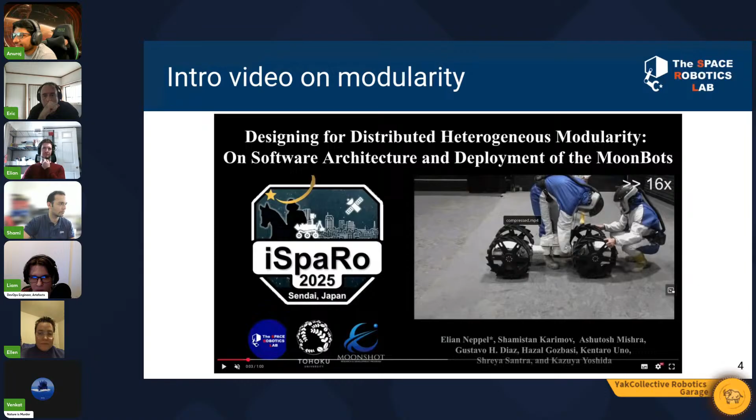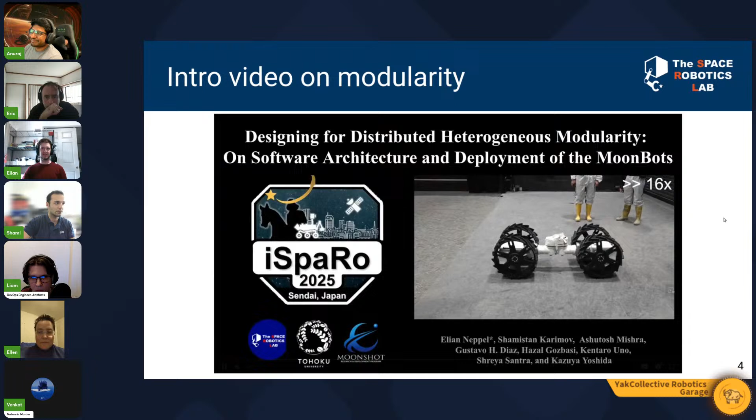So first video to introduce the modularity aspect of everything. This is the video for my upcoming paper at iSpaRo. So you can see we can assemble those robots together. Here is a 3 degree of freedom limb that we connect to 2 other wheels. And you can also notice that the robot is actually quite big. So it's quite dangerous to work with also. And then we can simply drive it around on this simulation test field that was at DLR, Germany. We went there. And just drive and explore just with this vehicle configuration.

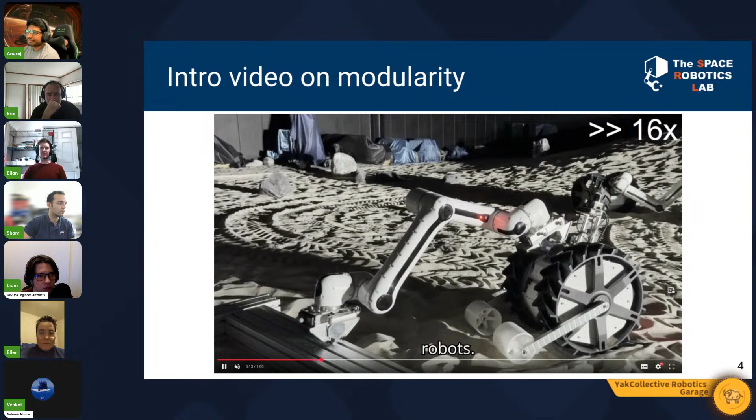And for assembling, this is actually the job of Shami, who is here today, automating the assembly. Here, his algorithm will go towards the wheel with one of the limbs, and then it will grasp automatically the grasping point on the wheel. And then the wheel can roll away.

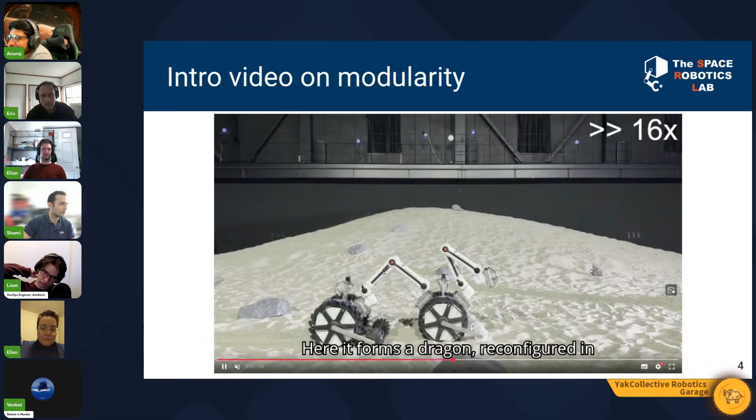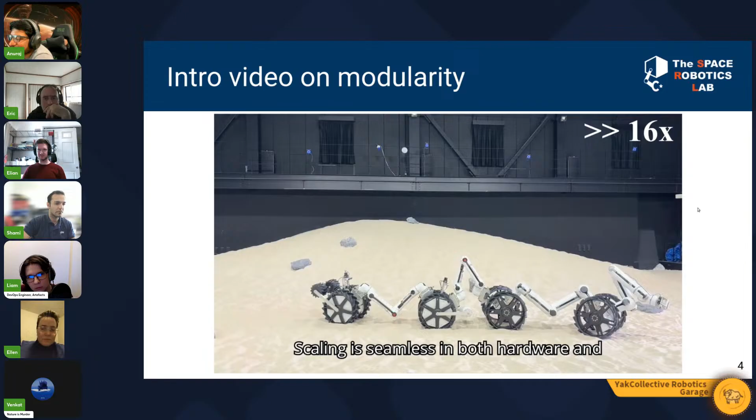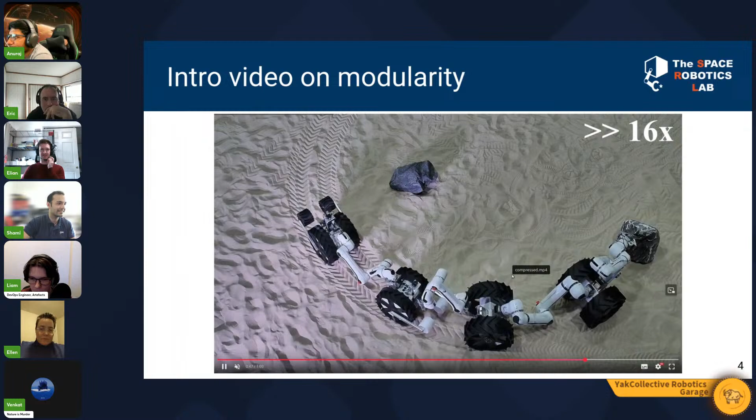Okay. From this minimal configuration with only one limb and one wheel, we can then connect them together to create a dragon. And here we can close the gripper and it can roll again. And from 2 dragons now, we can once again connect both of them to create something that we don't have a precise name for. But sometimes we call it the Shinkansen MoonBot, because there are many, many different parts and it looks like a train. And we can steer that, go somewhere, detach, and once again, continue onto a mission. So that's the introduction of the modularity side of the robot, that for us is the main goal of this robot.

Of course, the main goal is also going on the moon, etc. But as the developers of this robot, that's what we are currently focusing on.

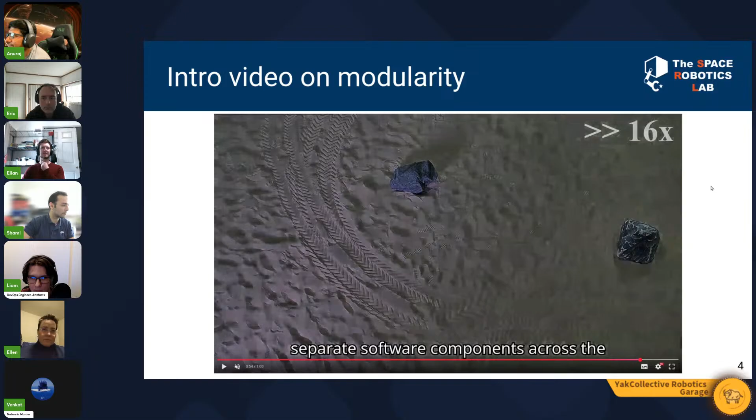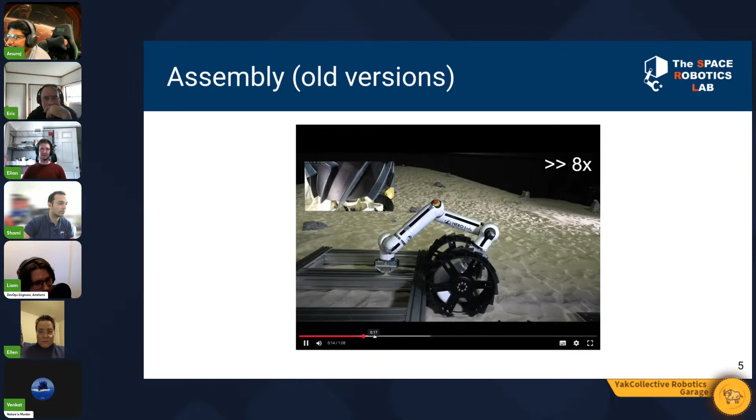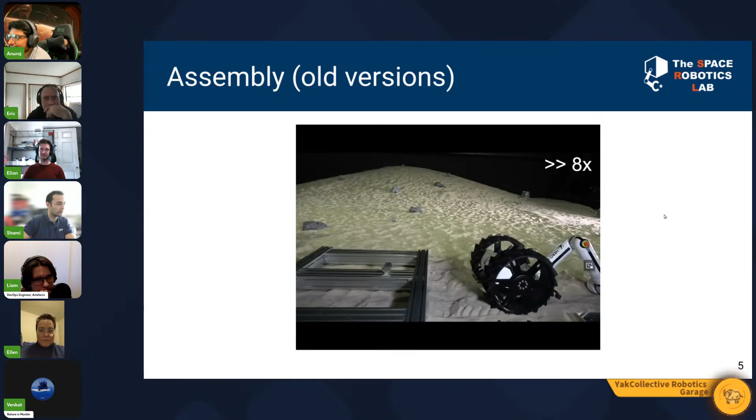And for assembly, this is a much older video. As you've seen before, Shami has improved this a lot, but here we can again connect to the wheel. Oops. Okay. We can connect to the wheel. This is an older version of the robot. Connect to the wheel and then drive away. This is a very old video, so it doesn't look that smooth. It has been improved a lot through time.

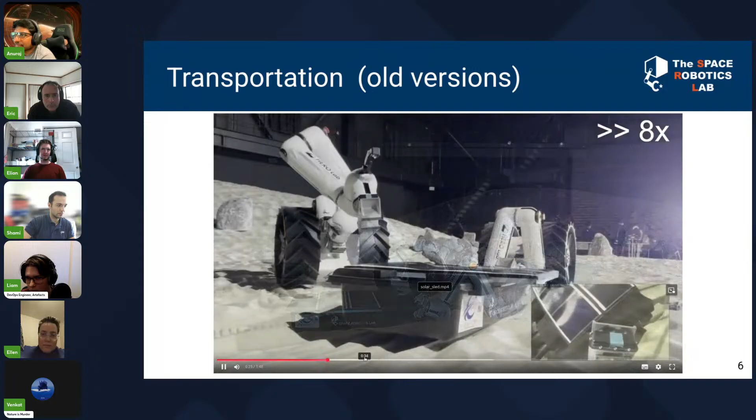Here for transportation, we actually can drag stuff on the ground using the minimal configuration. And here, for example, we bring a solar panel inside of a sledge, and then the dragon that is able to locomote and also manipulate will place the solar panel upright. And once we do that, we can kind of build a moon base. That's also a goal, to build a moon base, even though right now I'm more focused on modularity and the robots.

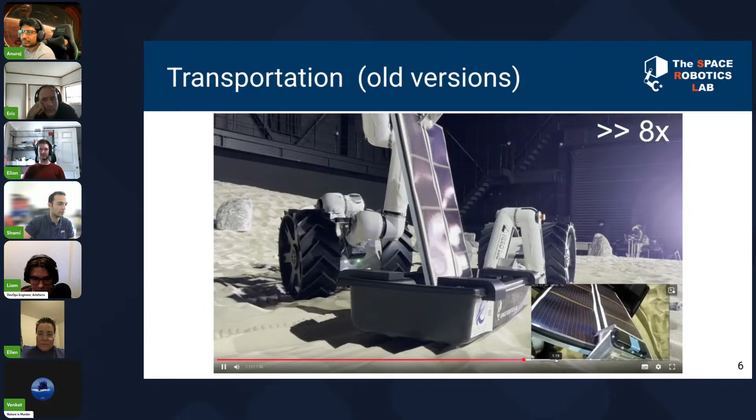So, sorry, is this automated or is it remote control in this video? Yeah, in this video it is teleoperated. Okay. So no automation yet. Thank you. Sorry, I keep switching slides because playing videos in Google is not okay. But yeah, it's teleoperated for now.

And even teleoperation of those robots is actually very difficult, as we'll explain on the network side, the software side later, especially for us that are just students. And there are many, many motors to control using inverse kinematics, synchronizing the wheels, etc. That's already very hard.

We have some more manipulation video. This is just to show off maybe the inverse kinematics that are working. So here we have actually some kind of inflatable module, and we want to place something and interact with the inflatable module to maybe do some repair or do some inspection. Or here we place a block to stop it and maintain it so it doesn't roll away. Yes, and this was the very first version. So again, we've done lots of improvement since then.

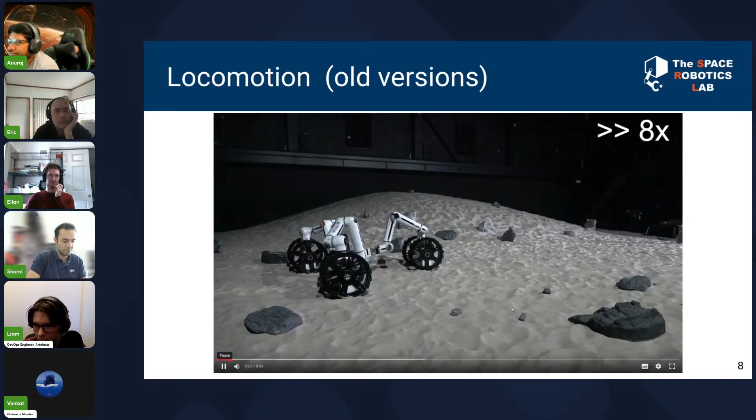We'll see later. And locomotion, this is the tricycle that we can see move with those 3 wheels and navigate. We are not focusing that much on the tricycle right now because we found it not very useful in the end. Yes, so those are the cool looking robots we have.

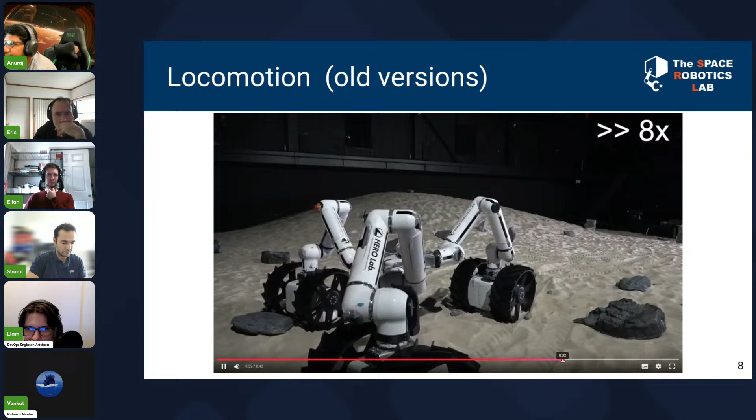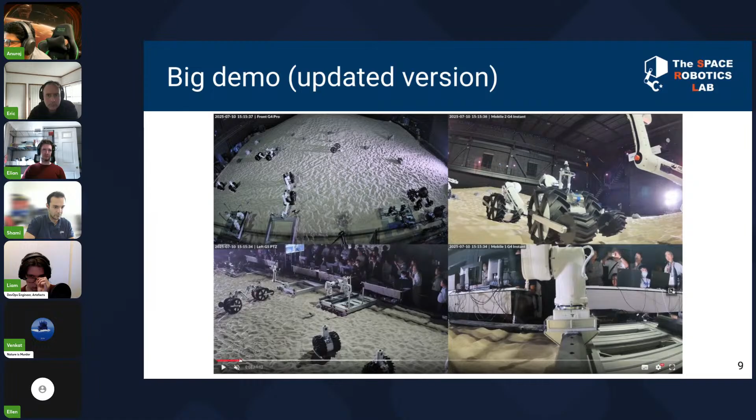And now for the new version, first we did quite a big demo in this sand field. This sand field is in JAXA, by the way. So in there, now it's automated. So you can see, wait, if I can take the laser pointer. Okay, it doesn't mark over the video, but basically you have the vehicle that is here under my cursor on the top left. This vehicle will start moving automatically towards one of the limbs that is around here. And you can see actually the limb on the top right camera there. So it starts automatically going towards the limb.

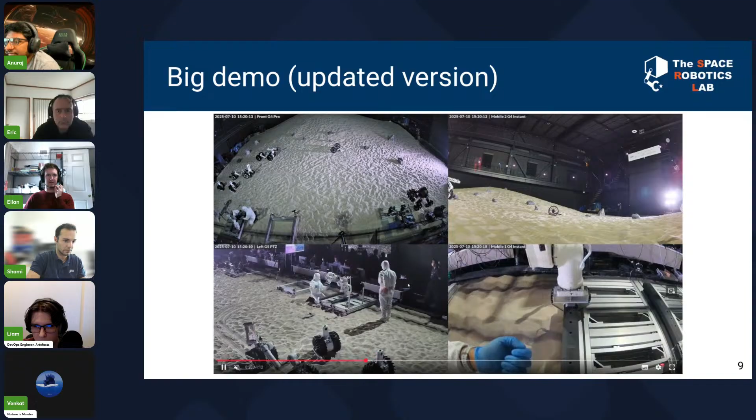Then Shami's algorithm will automatically connect to the vehicle. And once it's connected, it forms a dragon. And then this dragon has a manipulator and can continue to locomote somewhere else. And here you can see that compared to the videos before, it goes much faster and much more smoothly. Then we had the second dragon in the back that was running on the same network. Networking is a huge issue we face.

And this one will actually go towards the inflatable module, which is this white cylinder in the back there. And actually it is also automatically guided towards it, this time using a camera system to find where the inflatable module is and automatically steer towards it. And it will slowly go towards it. It went towards it a bit too well and collided with the other robots that were on the field. So there was this, but it actually went there.

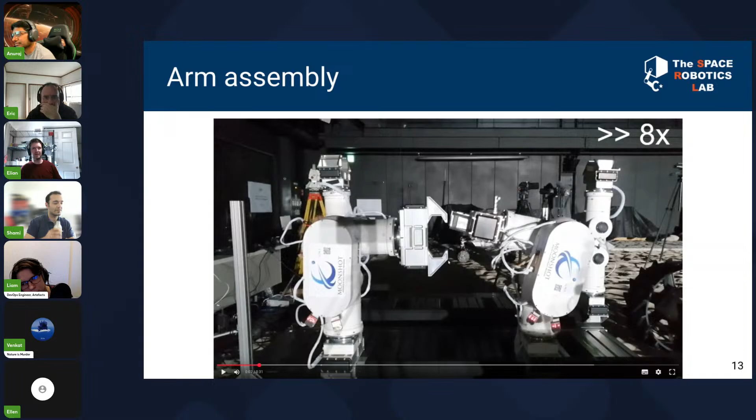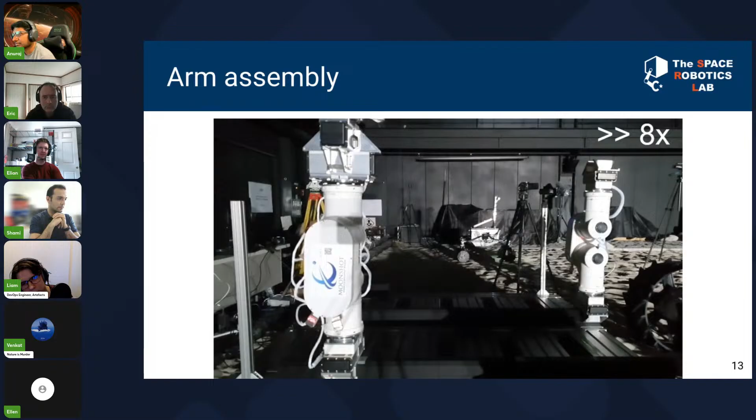Again, the assembly by Shami, I think he will show better videos than this a little bit later. And we've also already seen many of them. This is actually the 4DOF limb module that's made by neither me nor Shami, but someone else in our lab. And it's also very cool because they can assemble themselves: they go from 4DOF, then they connect, and now it becomes actually 7 degrees of freedom. And it forms a bigger limb.

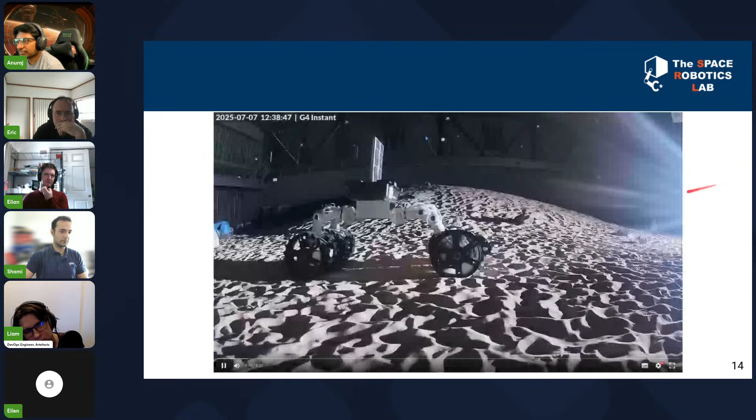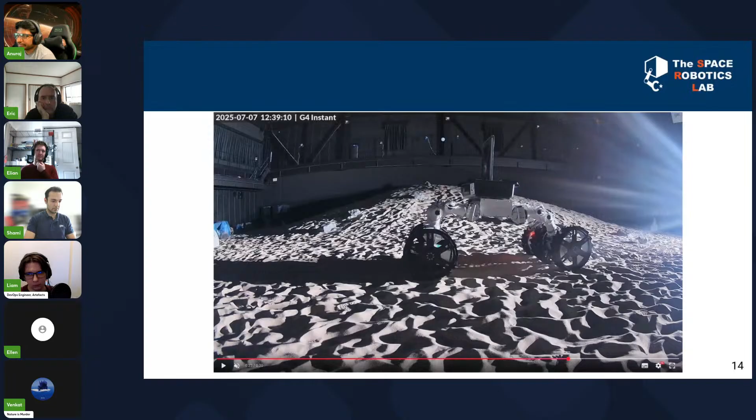And okay, those can also be used for this kind of cargo transportation. If you remember before, we had the tricycle with 3 wheels. This one is actually a bit more lightweight because there are fewer motors, and we can once again steer around, etc. That's Shami's slide. So if you want to take it from there.

Thank you, Elian. Could you please start the video? We can just continue sharing this one. So right here is one of the configurations that Elian was explaining, for example, the tricycle. But this time it also has a manipulator on the top of the body. This experiment has been conducted in the lab.

And as you can see, the legs, which are basically the same manipulators as the arm on the top, are acting in this experiment as a height extension and going down closer to the ground. And thus it allows the manipulator on the top of the body to grasp the solar panel and transport it. And then, of course, they can raise up, and everything is being synchronized by the software that Elian has developed. And I believe he will talk about this a bit later as well,

in more detail. But utilizing this software, as for example Liam asked about the shared data bus, there is nothing like that. So basically, the software is the master in this case. It is conducting everything, so nothing gets stalled or left behind and stuff like that. Yeah. Can go to the next slide.

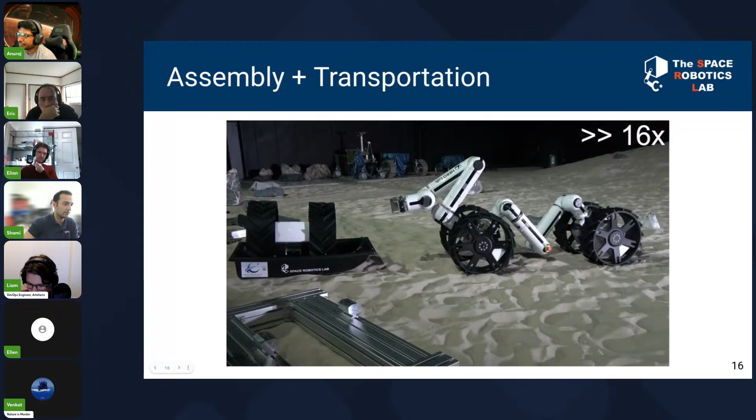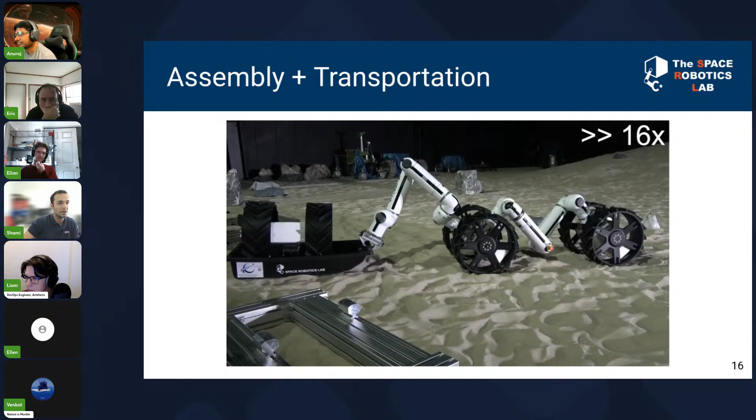And of course here, the same dragon is reused to, again, autonomously grasp the sled and transport it. The idea is also, in this case, software-wise, to reuse the same controller for different manipulator configurations. So that's my work, basically what I've been doing here, developing a controller that can be reused across different platforms without any big tunings or changes.

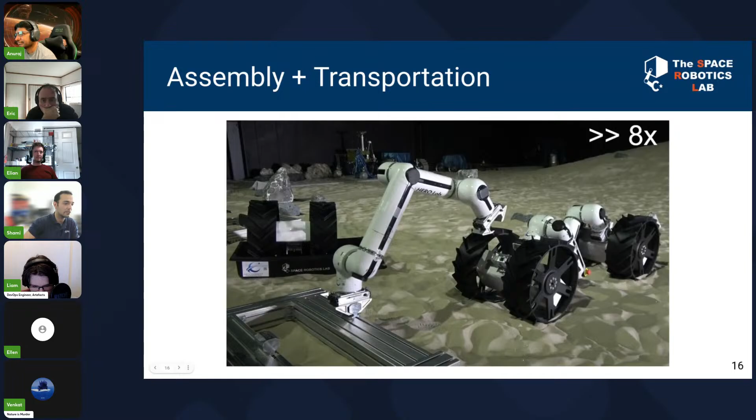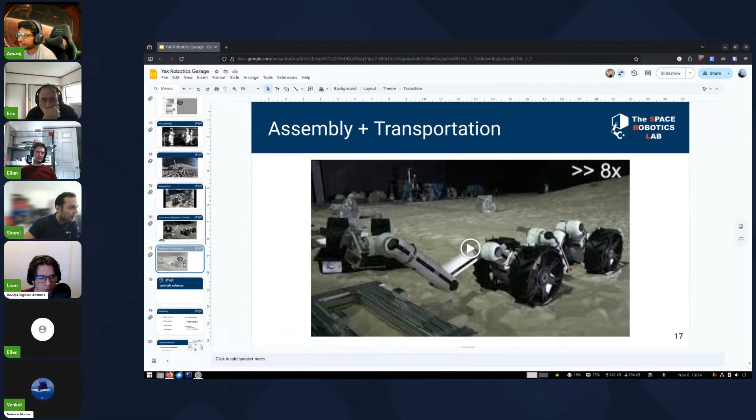Actually, Elian, can you exit the slideshow and start again? I think I added one more. Yeah, after this one. The one before. Yeah, the one before. The one after 16, slide 16. Yeah. Yep.

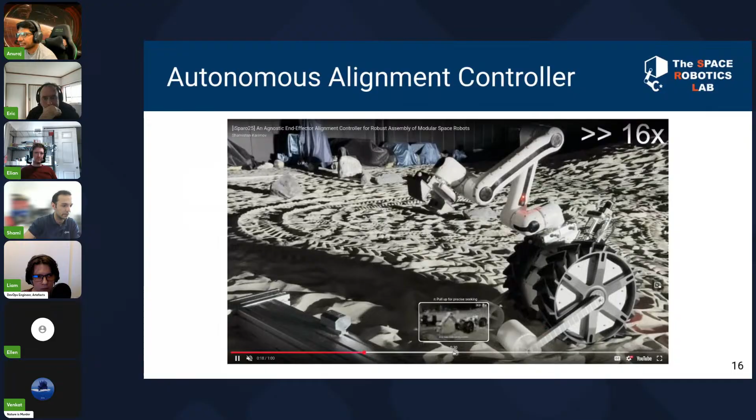So this is the video that I have submitted for the conference. It's gonna be in December, actually in our city. And this is about the controller I've been talking about. You can skip this part. We already showed the dragon part. Yeah, but the idea is, as you can see, the controller is reusable over different configurations and even different manipulators.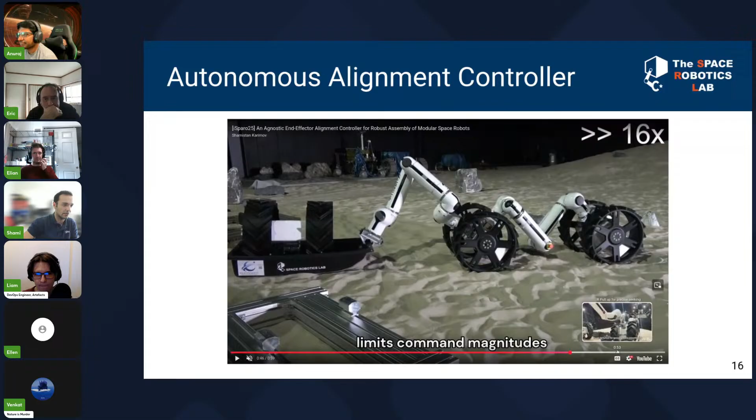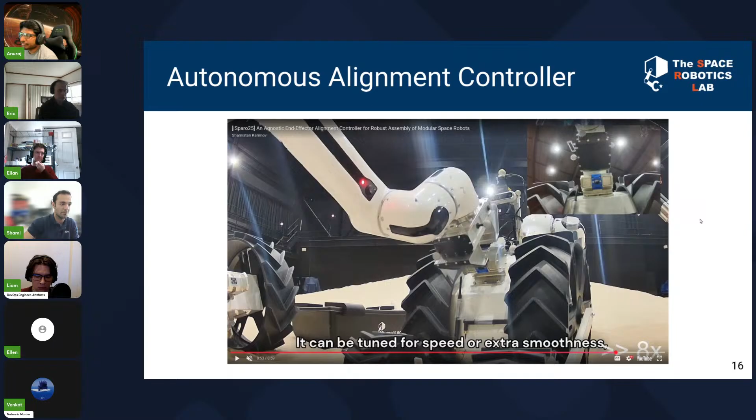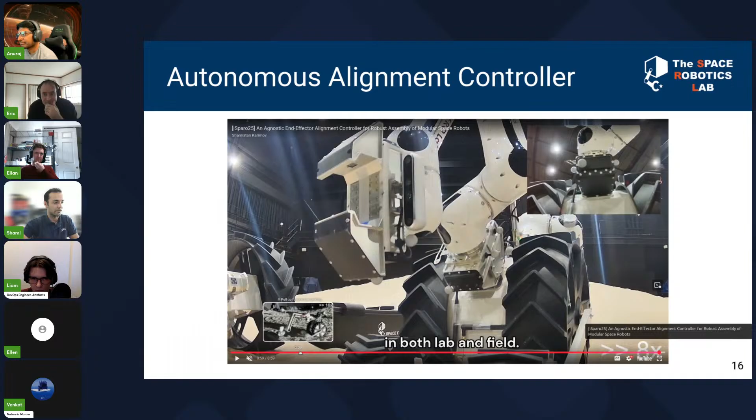For example, right here we have the V1 configuration, the old version of the arm, doing the assembly or grasping on a manipulation task. And after that, we have the same controller running on a different kinematic chain of a manipulator and performing the same way, and doing a self-assembly, for example, in this case. So tasks are different, and robots are also different. The configurations are different, but the controller is able to adapt and also assemble robustly and stably.

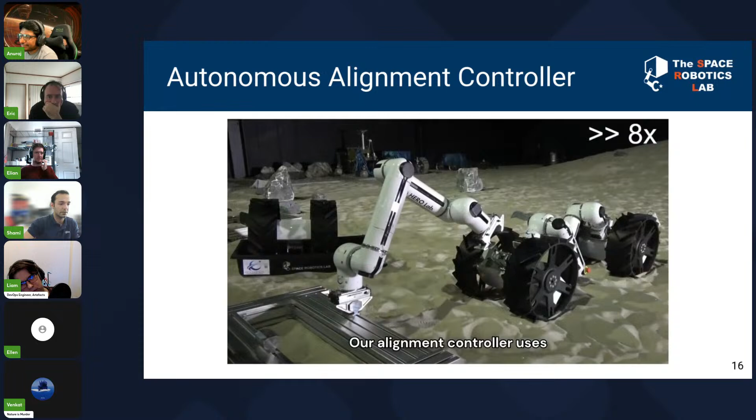I think I can go next. Yeah. Okay. That's it for you? I think for now, yes. Maybe later as well. Okay. Yeah. Interrupt me later if I miss something. There's also a lot of questions that people are asking, so I could go over that later as well. Yeah, okay, but let's go over that right now. Before talking software, let's have a small break and talk about just the robot itself before everyone forgets about the robot itself.

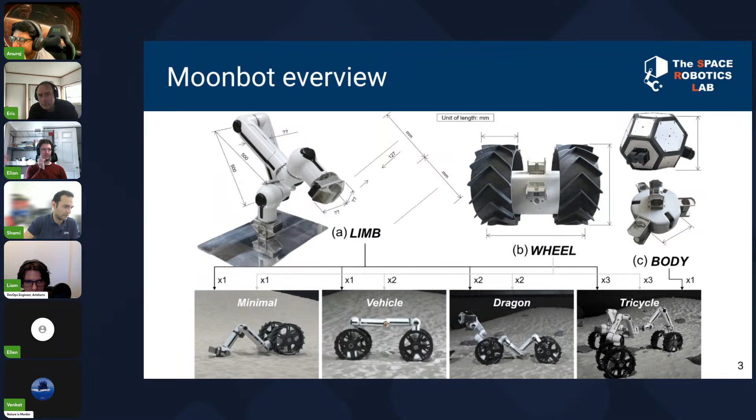Regarding some questions that I saw in the chat about the hardware, as I said, it is custom-made hardware, and right now in this presentation we have presented only the version 1, which is this one, and version 2 slightly, but there's also a newer version that we have presented at the Osaka World Expo. And actually, that one you can see on the tricycle manipulation that I have added. So that one is the newest version, and every newer version is of course improving, with a different power source as well.

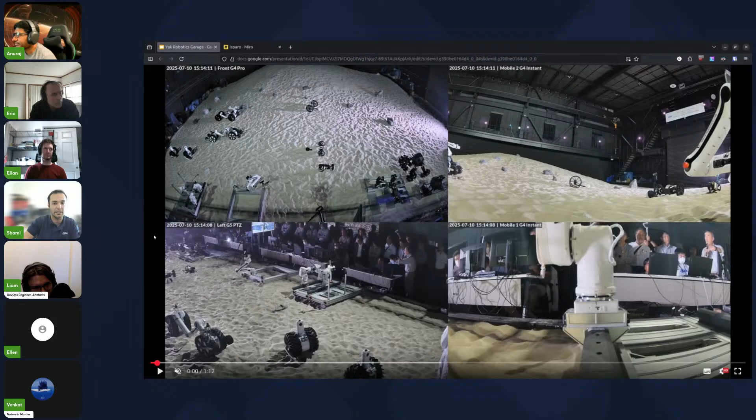It's of course under the hood. It's using a battery, like for the arm or for the wheel, but overall the power structure has been improved. It is using a battery management system to basically manage the flow of the power and stuff like that. And newer versions of the hardware also have chain charging, let's say. So for example, as we mentioned, these arms connect to the wheels a lot, and they also connect in, for example, series or parallel, etc.

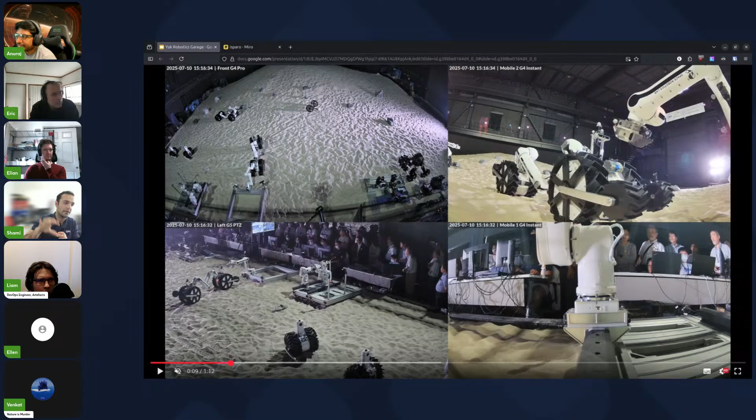And every gripper has a connector that attaches basically to the grasping point of the wheel, also basically transmitting the power. So if we have external power, for example, connected to the end of Dragon, to one of the wheels in the back, the power will get transmitted up to the manipulator. So this way we can easily charge the robots as well, much faster, using less power supplies and less cables and stuff like that. But also they can transmit power in between, even if there's no power supply. So they basically kind of use a unified and centralized power supply when they are attached to each other.

Then also, how is the recharging of the power source? Just using basically normal power supplies. We attach... Yeah, the BMS inside handles the balancing of the batteries and charging of the batteries, and so we just have to plug a 24-volt power supply, and then all of the modules that are connected together, if they are the latest version, they will then share this 24 volts between all of the BMS.

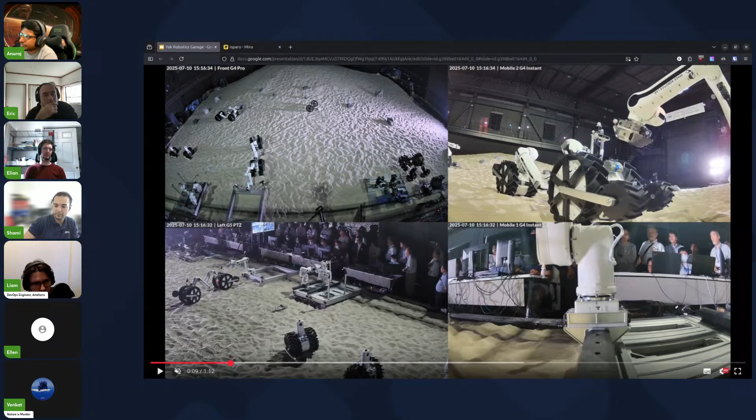Yeah. So on the moon, it will be solar panels, right? To charge the robots? That's the idea. Yep. Actually, one of our students also has been researching different ways of charging. For example, it's really not my field, but it's microwave power transmission. So using microwaves to charge the robots, which is also another interesting way. But still, of course, research in progress, and hopefully we can find some feasible ways to implement those as well.

Yeah. Is there any other question? There was a question about how the arms communicate. Usually now we are only using Wi-Fi, right? Yeah, we will see that later in the software. It's only Wi-Fi, and right now in those videos they do not communicate between each other, but we are currently working on a mesh network to do that.

Yeah, there's a question about materials from Ellen. So materials that are used are mostly kind of like a mix of PLA and carbon fiber. That's the outer casing, of course. The actuators are mainly aluminum alloys and stuff like that. The gripper as well. The gripper is also not fully aluminum. Some of it is just plastic PLA. So it's not really heavy, but because it's really big,

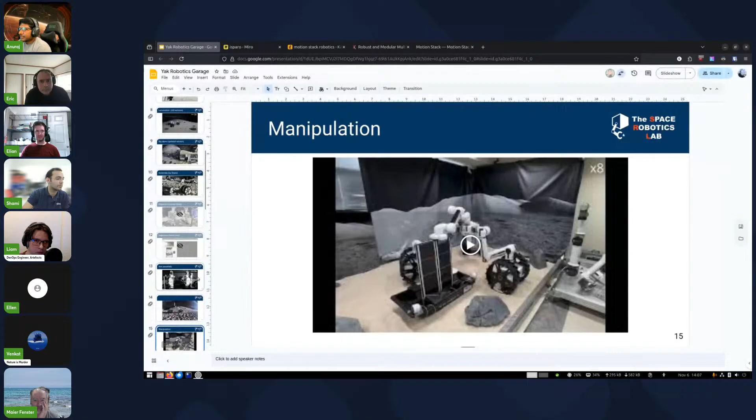I think we can move on to the software now, right? Yeah, okay. I think we talked about everything on this side. If there are more questions in the chat, we can answer later, of course. So let's continue on the software, which is more of my job, so I can answer the questions much better and much more in depth.

So first, we want to work with modular hardware. When I started working on the software, I noticed that if I want modular hardware, I also need modular software because I cannot reuse the same software everywhere. It has to be modular also. Modular software and hardware means that the software then has to be module or robot agnostic. It should be usable on any robot.

So when you think of robot agnostic software and ROS2, which is very popular right now, you of course think of MoveIt2, where you can just give it a URDF and it will compute the inverse kinematics or the trajectories you want. But there is a quite big problem with MoveIt2 that makes it not usable for us: it's only usable for one limb at a time, and we do not have that. And it's also only for manipulation tasks.

As you've seen, we have the wheels rotating, steering left and right, all of this. And also we have to change the configuration and change the URDF quite a lot. And with MoveIt, when you change the robot, you have to reconfigure everything in the settings. You have to say, okay, there is this joint here with this torque, this joint here with this torque. Every time we change the robot, that takes way too much time.

And here's some more videos, because I don't want to speak too much about theory. Here, for example, I don't know how many robots, but this is version 1, 2, 3, and the 4DOF arm, and I control all of them at the same time. This is not just mirrored joints, it's really different robots loaded inside of the software that are all being controlled at the same time. This is Gazebo, right? No, it's not Gazebo, it's just RViz directly. Okay. So no simulation.

If I can play the video. Okay, switch to the next slide. Can I get... Okay. I just wanted to show something else, but apparently Google doesn't want to let me.

Oh, yeah. I think around the end, here I just use the user interface that Shami did, and I'm going to select more of those robots down here to make them move. And they also started moving with all of the other robots. So you can see it works in runtime to consider more or less robots that are all different, with different DOF, etc. It's actually pretty cool.

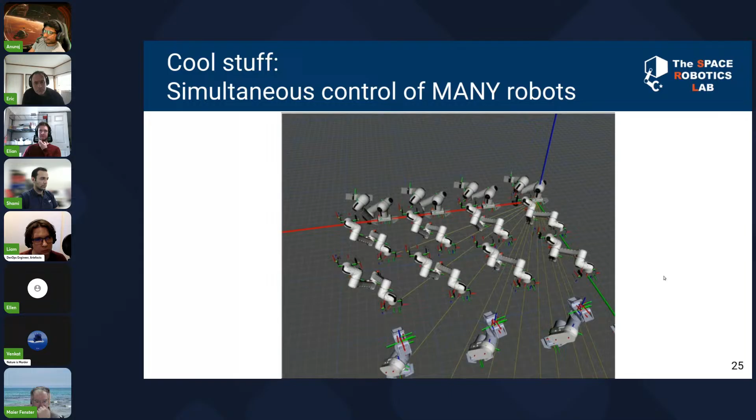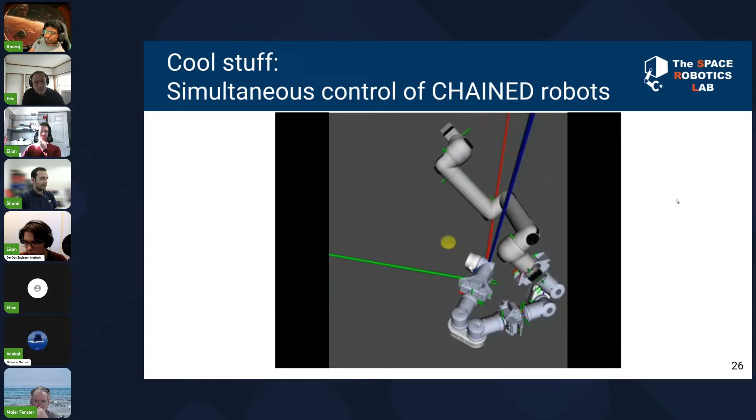And those were all robots in parallel. We can also put them in series. So here I'm doing end effector control, moving back, up, down. I don't know how many DOF there are on this, but it's 4 robots, one after the other. And they are moving using inverse kinematics, forward, up, down, doing all of the computations of the joint angles to do that. So that's also pretty cool. We never did this in reality because we don't have a robot capable of doing that, but it is just fun.

And finally, this is more on the API side. You might be asking, okay, how do you make the trajectory for all of those different robots? Isn't it very hard to know, okay, this motor is slow, this motor is fast? How do I keep them all in sync so the trajectory doesn't become a gigantic mess in the end with that many different robots? Especially when we want to launch a new type of robot.

I actually don't want to fiddle with 10,000 settings to say, okay, this motor speed is that, this motor speed is that, etc. If I could, I would like to not do any setting. And actually, that's possible with this software because all of the trajectory and adaptability actually happens at runtime.

So here you can see I'm currently synchronizing the trajectory of actually 6 different end effectors. So there is the big MoonBot here. There is a small RealMan robot, it's called, here in red. And then there are 4 end effectors for this small quadruped in green.

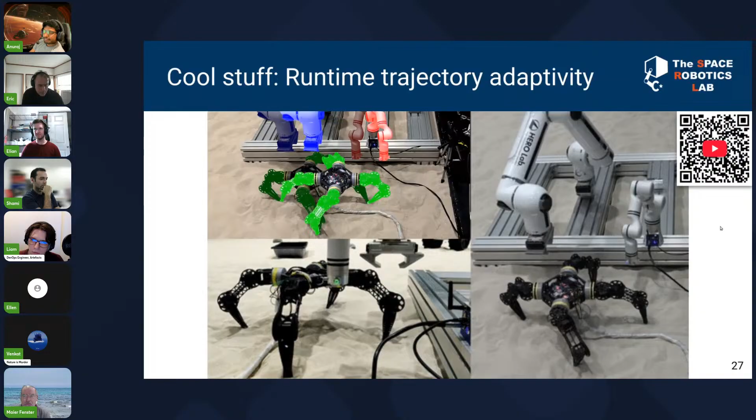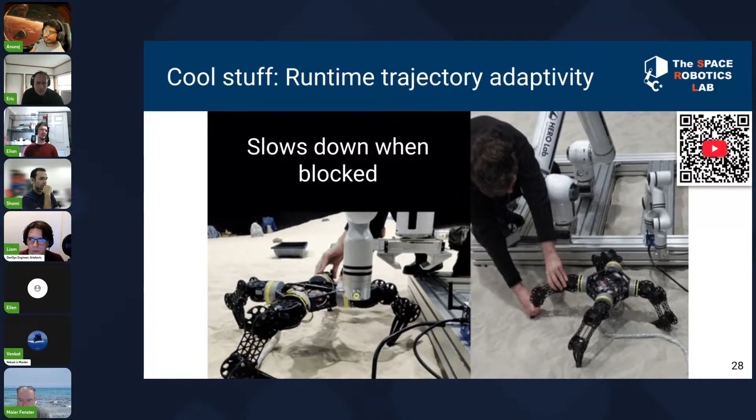And here, if I use my hand and just slow down one of the limbs, you can see that the trajectories of all of the other limbs also slow down and wait for this limb to continue moving. So they all wait for each other before continuing the trajectory.

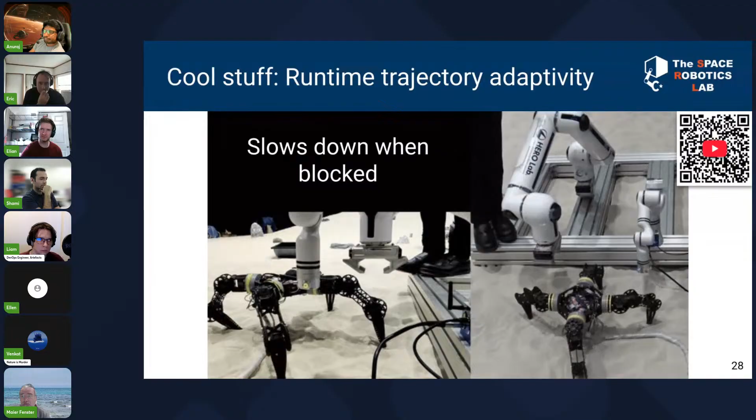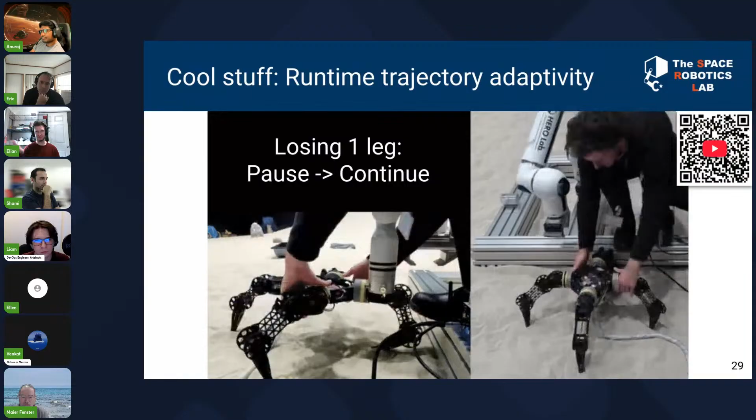And to handle also network problems, you can disconnect the limb, and if the limb disconnects, or if any motor disconnects, it actually stops the trajectory. When the limb comes back, it continues the trajectory. So this was initially developed because of network issues, but it also works if you just unplug the leg directly on this robot, which is also pretty cool.

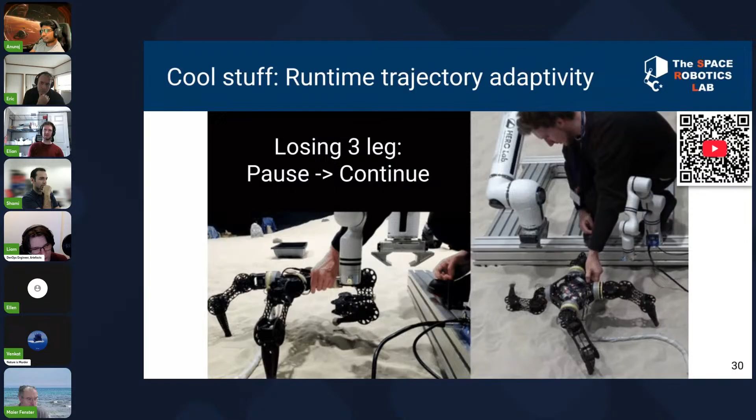And you can, of course, disconnect more than one leg. You can do pretty much anything. And as long as the trajectory is able to continue, it will just continue. And if I also unplug the power of this small robot, you can see the robot falls. And then the motion stack software will make it stand up again to go back onto the trajectory. And then the trajectory will actually continue.

So that's also very cool and very safe because we want safety first, also because if you want to go on the moon, we cannot break the robot. We cannot repair it, so it should not fail. And also I want safety because we work with students that do not have a lot of experience working with robots. So it can be very dangerous. And as you know, those robots are like 20 kilograms. So it's very dangerous to work with. So I don't want anything weird happening on the safety side.

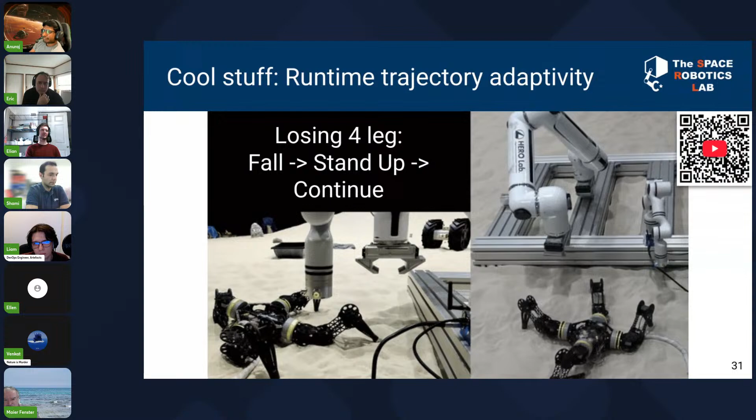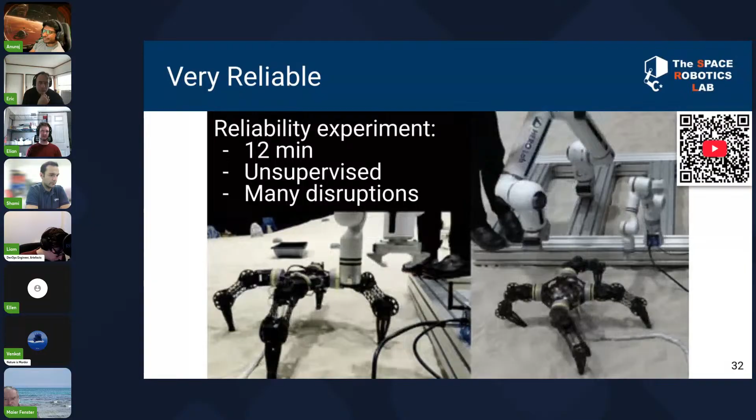And yeah, actually all of those videos were taken from one single experiment that lasted 12 minutes, where the controller just continued doing the trajectory without me doing anything on the software side. All I did was unplug stuff and try to break it, but it continues.

And that's the end for me. If you want the motion stack software, it's here. And yeah, we are looking in the future into using Zenoh instead of ROS for improved reliability and making, I think, robots open source, because this is just the core software. All of the robots with the URDF, the launching system, is not open source yet because of patents and things like that. But the core software, if you want to use it on your robot, it's here.

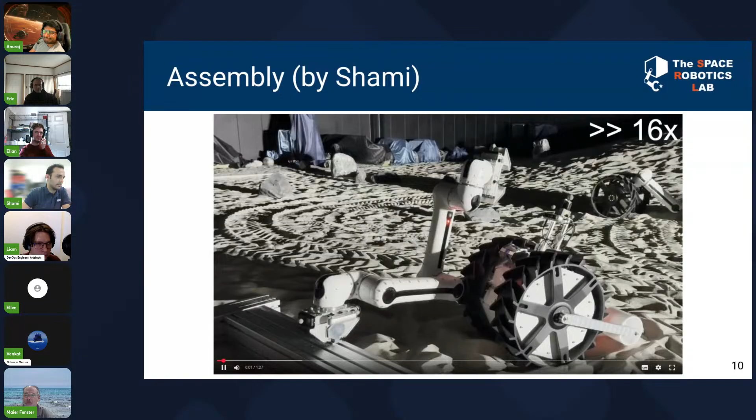So how are the wheel modules? Are they also controlled by this? Yeah, they are also controlled by this, actually. We just don't start the inverse kinematics on them, and we can just control them normally. Yeah, and also because of the synchronization that Elian was showing, it's not only end effector synchronization, but also on the wheels, on the joint level. For example, you can show the Shinkansen stuff. Okay, yeah, I have it. This one, yeah, that one is in your paper video.

But the motion stack handles the synchronization of the wheels on the joint level. So all of the wheels which are controlled, in this case it's 1, 2, 3, 4, 5, 6, 7, 8. 8 joints are controlled at the same time, and if even one of them loses some connection or breaks or it just dies, explodes, anything.

So if it's not continuing the control trajectory, then the other ones will wait. It will just stop, and that's also really good. Basically, if one wheel stops, all of the wheels stop to stop the train and not break the train. So imagine if the front wheel were to lose connection and stop moving, then the other wheels on the back should also stop to avoid breaking the robot. So that's one advantage of the synchronization that works on end effector and on inverse kinematics also.

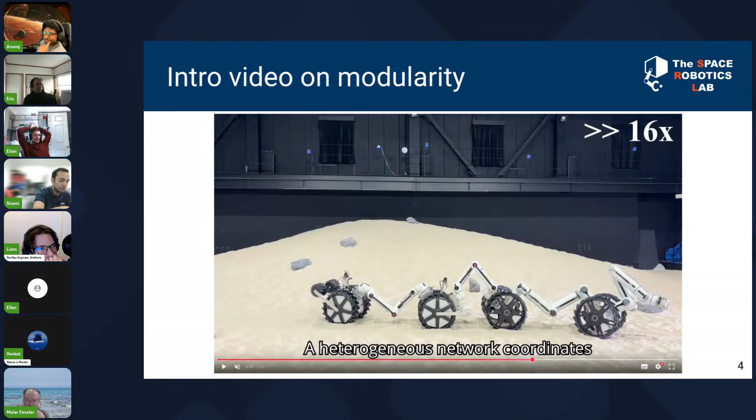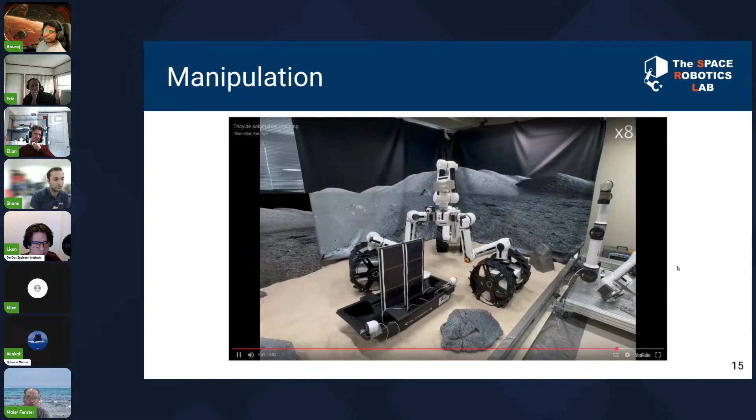And in this case especially, you can see how useful it is to control different robots and synchronize them. So you can control stuff like this. Because we don't want to have one leg pushing up while the other legs are stuck. When you are connected to the central body, they should all be at the same height.

Do the wheel modules and the arm have the same controller board, or are they heterogeneous? They have the same. You mean lower level? Yeah, the lower level hardware used. Like the hardware, yeah, it's the same. Actually, the low level we also developed. It's not anything open source. We just developed it from scratch using the normal common libraries and stuff like that, of course. And we developed those things in a way that is also modular. So we have only one low level controller, and it works for all the robots, whether it's an arm or the wheel.

It just launches the correct way, and it's heavily inspired by the launch API of the motion stack. So it's kind of working in the same way and knows what to launch. The robot itself knows what motors it has, what it should launch, and stuff like that. And we have this Maxon motor on this robot. But we actually use O-Drive on another robot. The 4 degrees of freedom one uses O-Drive.

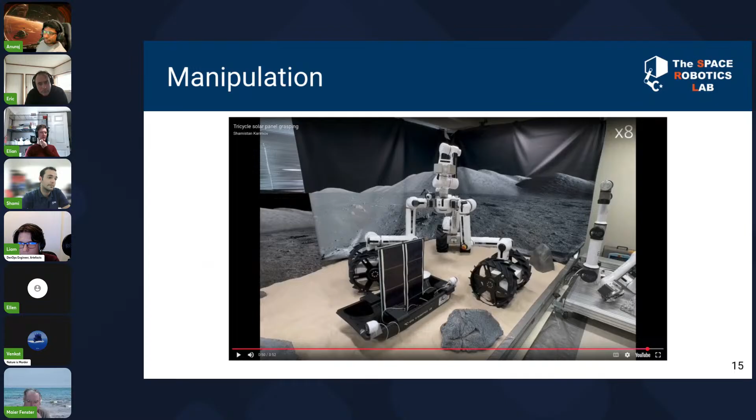And on the very small quadruped, this one is another type of motor. Those are Dynamixels. And the other one, the one in this video. So Dynamixel on the black one. No, Dynamixels on the green one. Maxons on the blue one, and the red one is Realman. I don't know which kind of motors it uses, but it's a different controller again.

Actually, this quadruped is called MoonBot as well. It's called MoonBot Zero. So this is the first iteration, the first concept basically of the modular robots. That's why the legs can also be detached and attached back, and they work. You can find the open source paper about this. MoonBot Zero is fully open source.

Cool. And for MoonBot Zero, why did you choose legs and not wheels? Because it was earlier in the project. That's it. But it was already for a moon environment with regolith, right? Yes, exactly. But I don't know who made the decision. It was made before you arrived, so I really don't know. And so there was a revolution. You made a revolution, and everything moved to wheels.

Yeah, exactly. So I started developing the software, and I was there doing quadrupeds, and all of a sudden we had 7 DOF 20 kilogram robots with 20 kilogram wheels in the lab, and now I have to switch everything to this. So that's why it became so deeply modularized, because the robot kept changing a lot, and we had to adapt fast.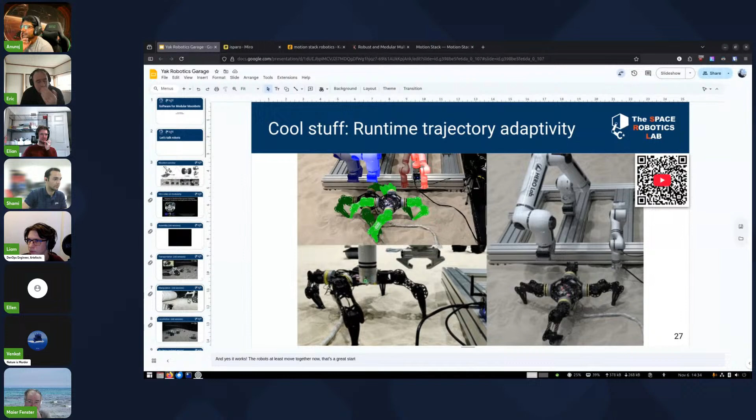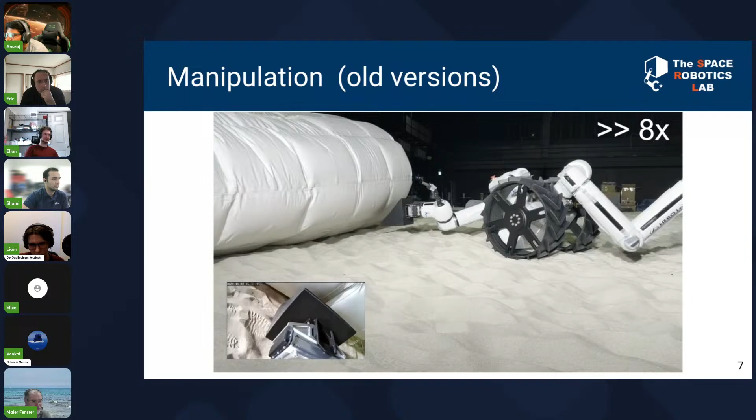First, wheels are better to transport loads. Obviously, they use much less power, so that's why we want to use wheels more. And actually, our team focuses more on not building structures, but building robots. So that's why we were more focused on that.

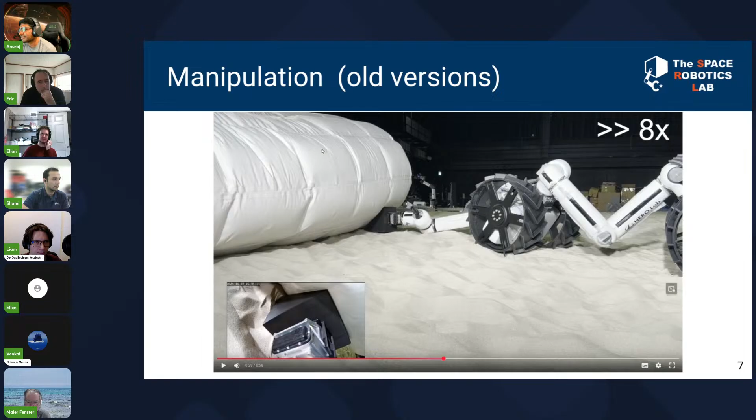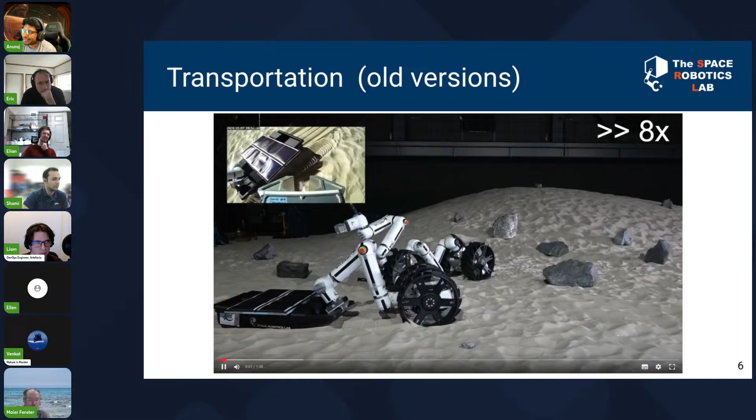But here there is more of a video of a building task, and the goal is more to build stuff. So we had the deployable solar panel video also that we've seen. This is part of this goal to showcase that we can build and assemble stuff. As to what do we build, I genuinely don't know yet, because you are a bit more focused on the... But it could be to assemble a solar array, for example, right?

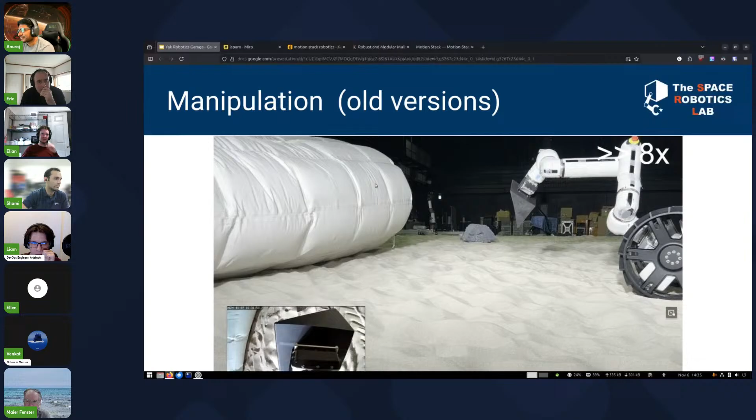Yeah, exactly. Solar array, or if you see actually this white thing, that's actually hard to grasp what it is. I'm sorry, I don't have a very good video about that. Maybe I have something on the demo video. Yeah, that's an inflatable module. It pops up, and I don't know if you can see. Can we see it? Yes, in the back here where there is my mouse cursor.

Yeah, it's pretty big, and here it's deflated, and the goal is to then build this structure. But the easiest way to build something is just to inflate it, and so it gets inflated, and then it forms some kind of habitat or something. Yeah. So there are actually some projects. Oh, please, Shami, sorry.

Regarding this, it is actually basically a research project that is also in the same category of the project, kind of. This is from a different university in Moonshot, a university in Tokyo, I think it's Institute of Science, something like that. So they work on this habitat, it inflates, and it has different cells, as you can see there, and by deflating and inflating these cells, it actually can roll.

So this one is a concept of an inflatable living module, or for example a research module. The inside will be constructed later, but basically that's the skeleton that just inflates and becomes somewhere where people can go and live. And the interesting part is, you said it's big, but this is just half size. The diameter of this one is 2 meters, and the original one is 4 meters. So it's even bigger. That one is also a really interesting project. We collaborate, of course, but we don't work on the development of that inflatable module.